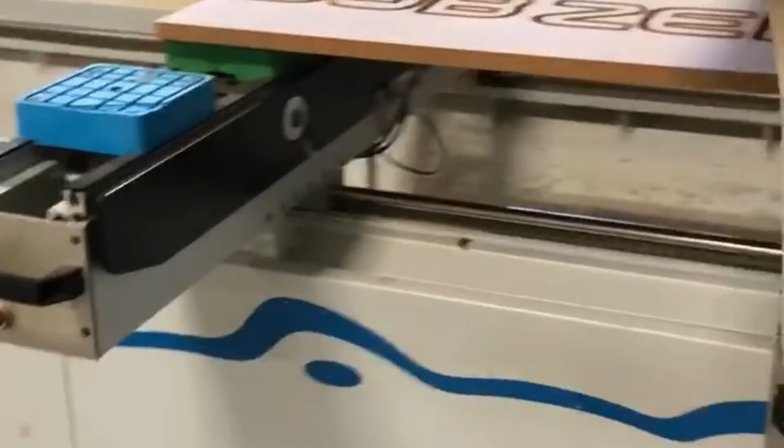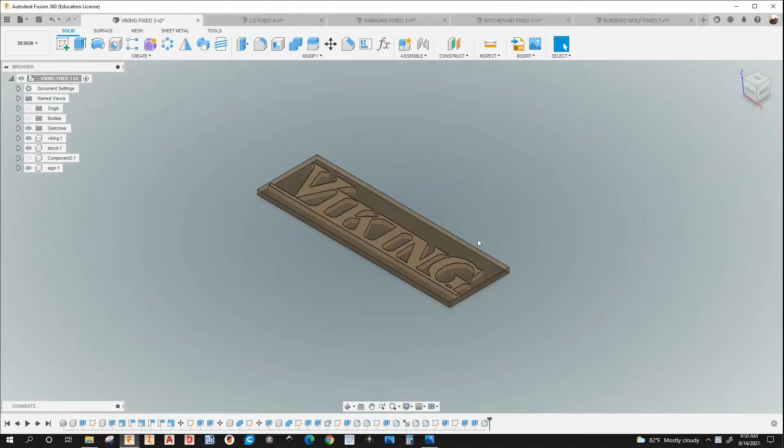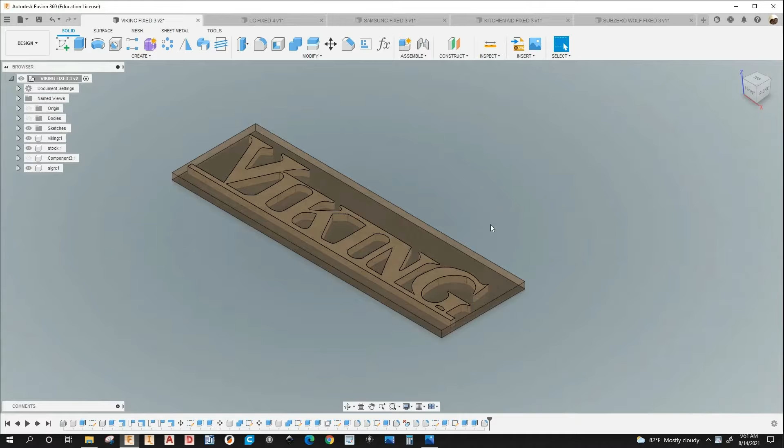All right, in this video I'm just going to show you, as you saw in the beginning of the video, the pictures that one of the co-workers took when he went to the exhibition show at one of the town hall buildings here around my area. He sent me the pictures, how the signs look, everything. And I was really happy about that. The signs came out nice as well as the cabinetry. I did the cabinetry and the signs on the Weeke CNC machine that I program and operate.

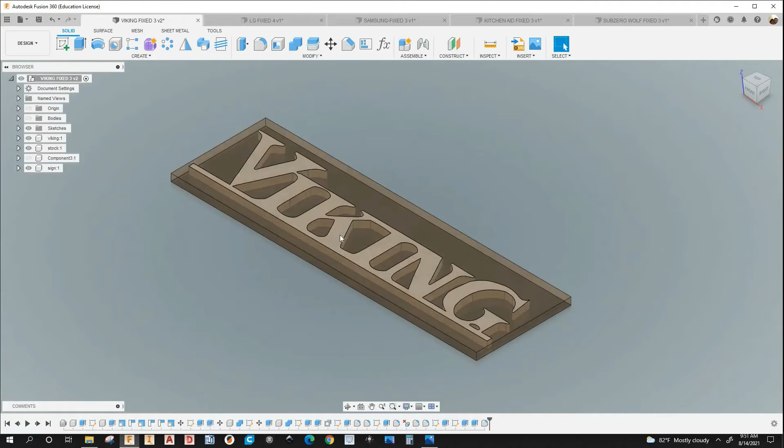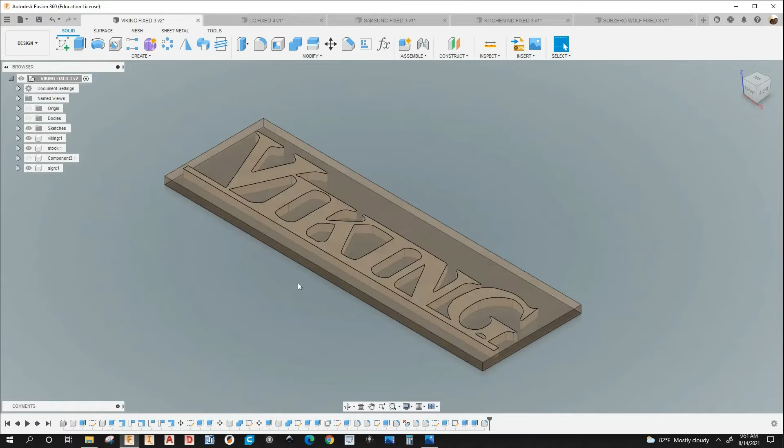But in this video, I'm just gonna focus on the signs, right? Because it's hard to model this in Woodwop or even wood type. So for this job, I used Fusion 360 for the 3D modeling and programming. It was way easier. It was faster. So right now we're gonna start off with the Viking sign, right? Let me show you the other ones. I got the LG here. I got the Samsung. I got the KitchenAid. I have the Sub-Zero and Wolf.

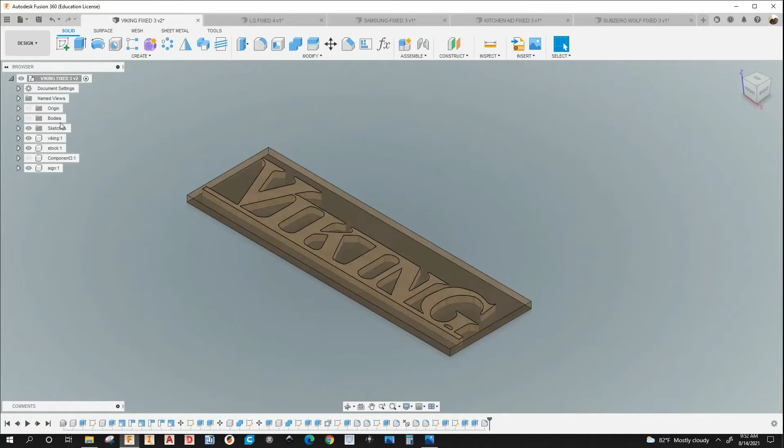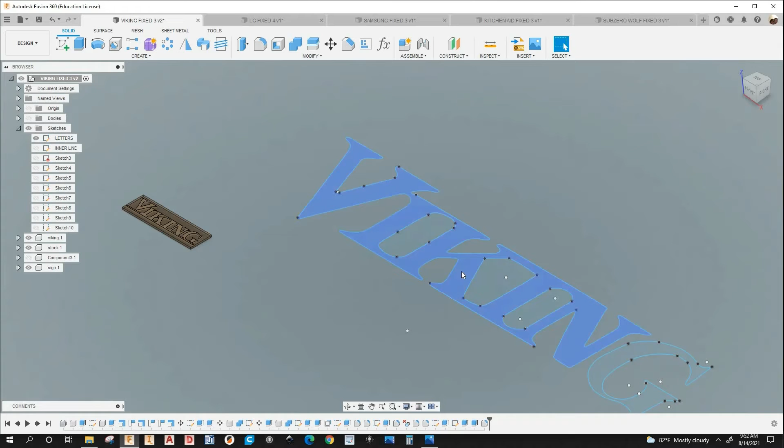All right, so let's start off with the Viking. So this is the 3D model. So I got the sign and I got the stock. All right, and I'm gonna show you the sketch. So it's right here. I think it's this one. Zoom out, as you can see it. It came into Fusion 360 this size. I had to resize it. All right. This was imported as an SVG file.

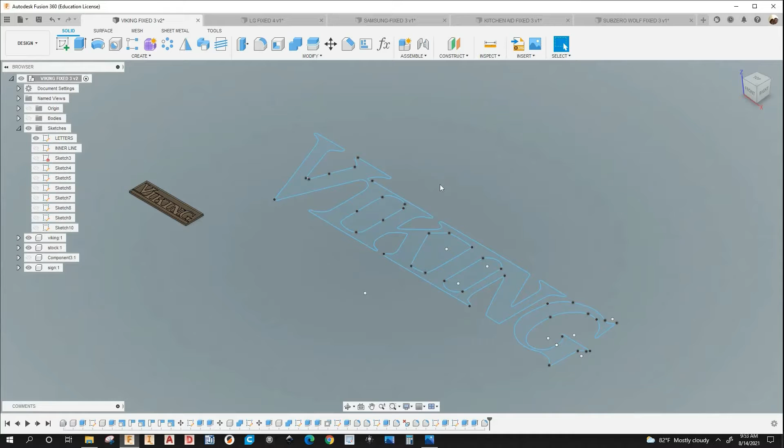So I got the pictures from my boss that he got from the customer. I imported those pictures into Inkscape. I traced them and I saved them as SVG files. And then I imported those SVG files into Fusion 360. All right, so this is an SVG file here, as you can see. Turn that off. All right, so I'm gonna show you what I did in programming. So I'm gonna go to manufacture.

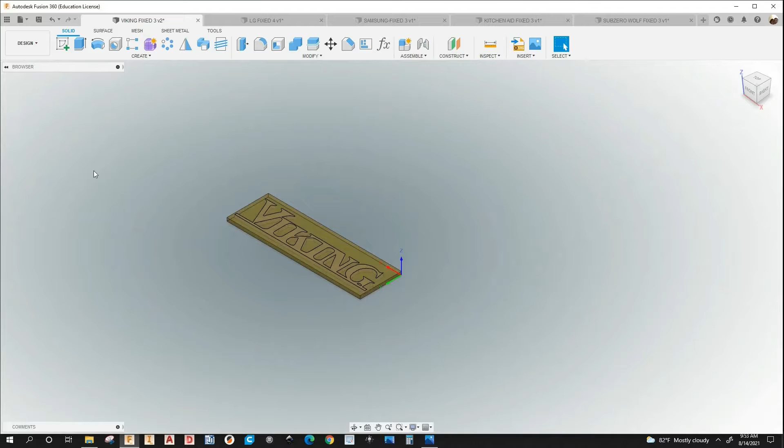So we started with the 2D pocket with a 1/4 inch end mill. I think I got a 4 millimeter step down. Let me check. Want to edit, just a 1/4 inch flat end mill. I have it at 6 millimeters because that's actually the size of the end mill. How do I know? Well, I did a test piece on the CNC. I checked the width of the groove. It was exactly 6 millimeters, so it wasn't 6.35.

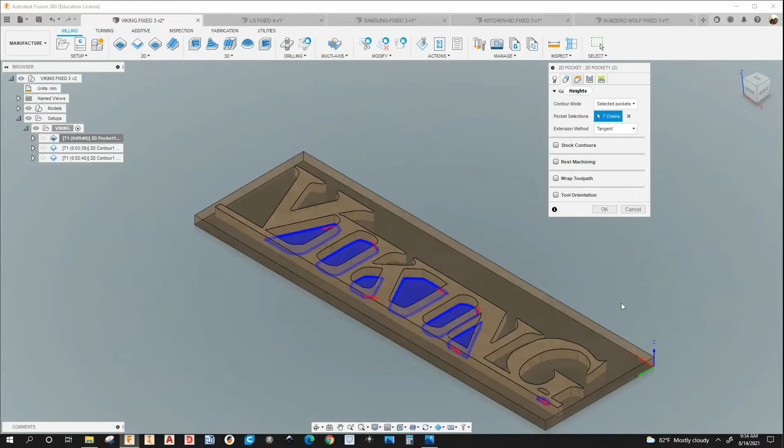All right, so yeah, let's go to geometry. So I selected the pockets and the heights. I left 1 millimeter material because I didn't want to cut the vacuum pods. I had like 3 vacuum pods here holding the part. Passes. So that's a 5 millimeter step down. All right. And the linking, the ramp type is zigzag. So then let's simulate this.

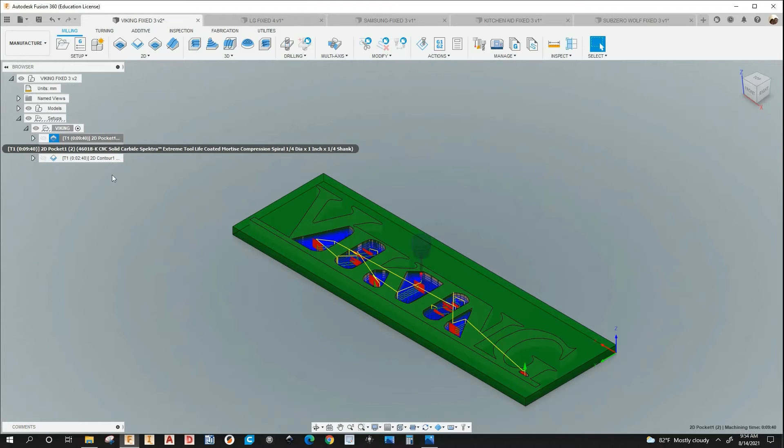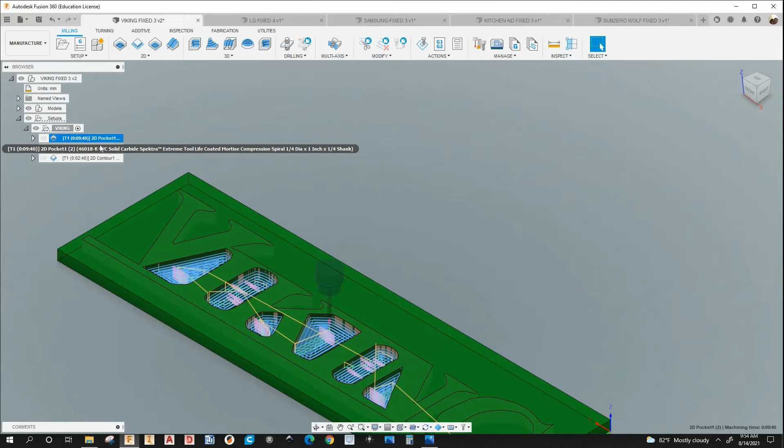There was a collision there, but you can fix that. You can just adjust the retract height. You can go higher than 5 millimeters. But I ran the program like this. I didn't have any issues with the machine, so I'll just leave it like that.

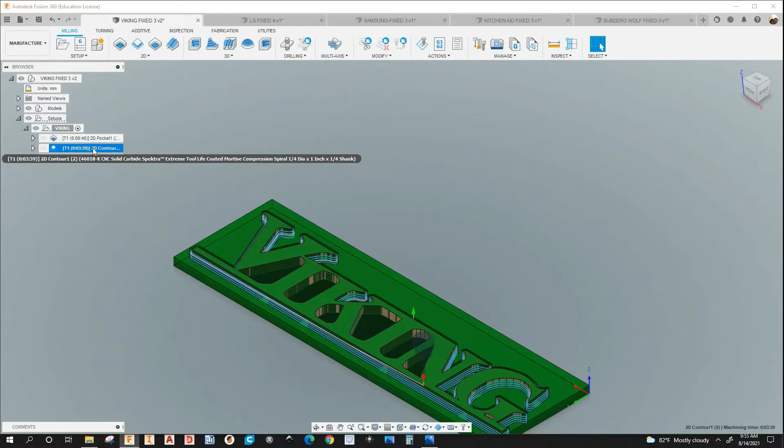And then I did a 2D contour with the same end mill, which is a 46018-K. This is a Spektra end mill from Amana, and used a 1/2 inch 46014-K. It's a 1/2 inch end mill, and the reason why I use a half inch after that is because

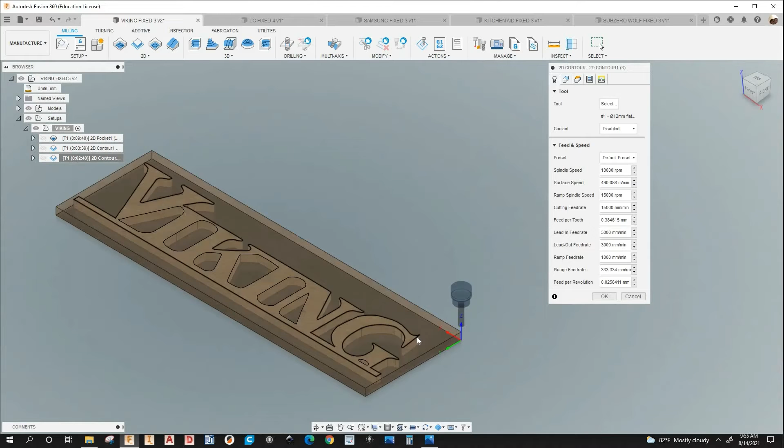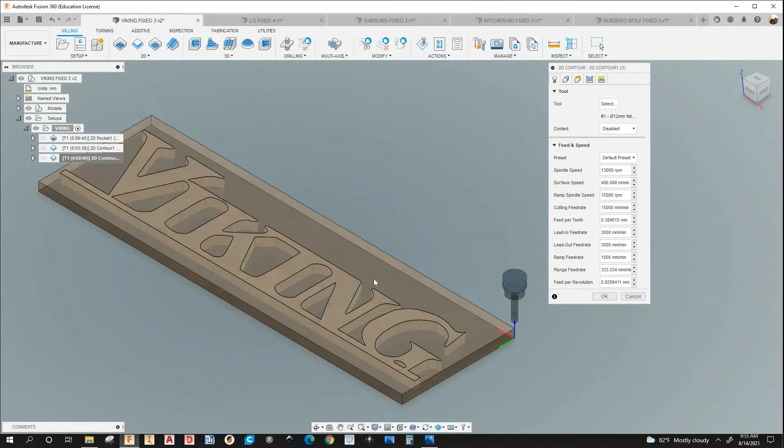the guys, the cabinet builders, they didn't have a quarter inch or anything smaller than a half inch to cut this sign out, right? With the portable router. So they told me they only had a half inch bit on their portable router. So that's why I used a half inch. And I did an offset of 2 millimeters, right? So the spacing will be just a little bigger than half inch, so you can get the router bit in there and cut the sign out.

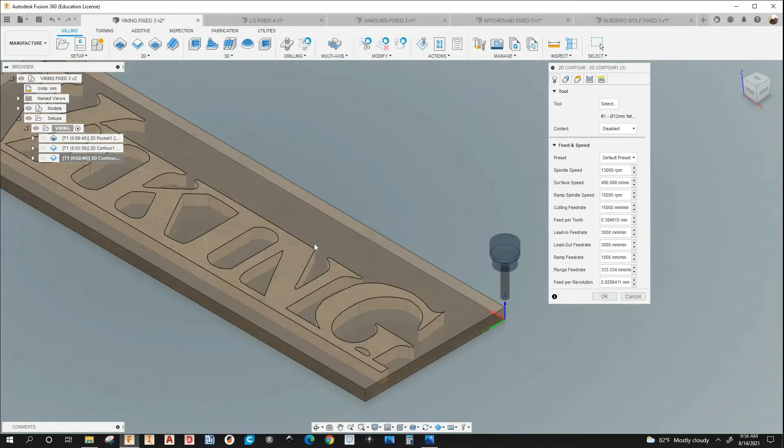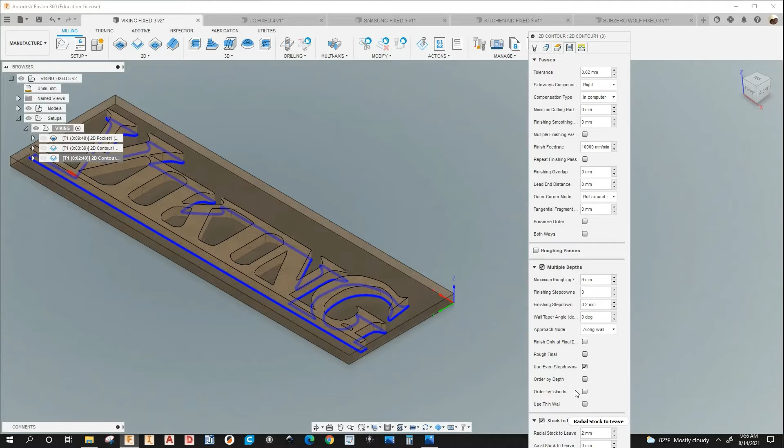So let me go to passes. I'll scroll all the way down. The step down is 9 millimeters. Let me go down to see where it says stock to leave. The radial stock to leave was 2 millimeters, so it was an offset. If you want to make the sign a little smaller, you put a minus number there. Positive is an offset.

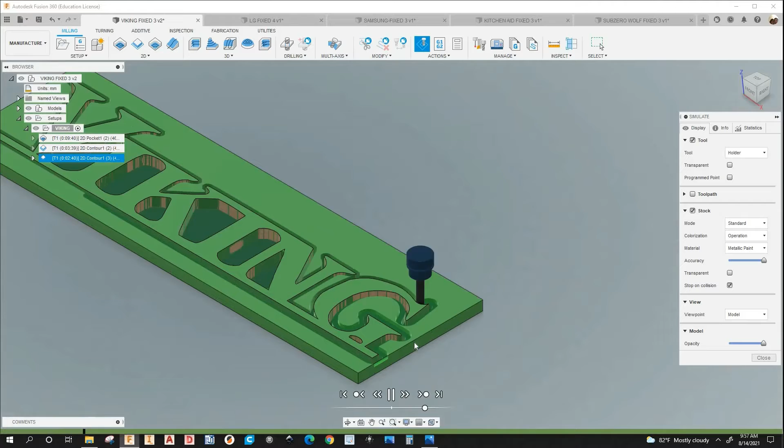So the tool is going to be 2 millimeters away from the geometry, right? So let me simulate that. I'll show you how it looks. Go a little slower. Put it on top view.

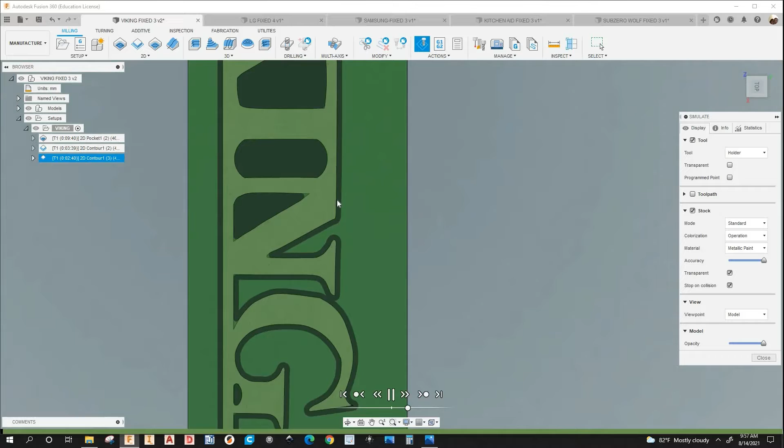Let's go to stock, transparent. See, so the tool is offset by 2 millimeters. So this will be like 14 millimeters wide. So that's plenty of space. So you can put a half inch bit there and cut this out, right?

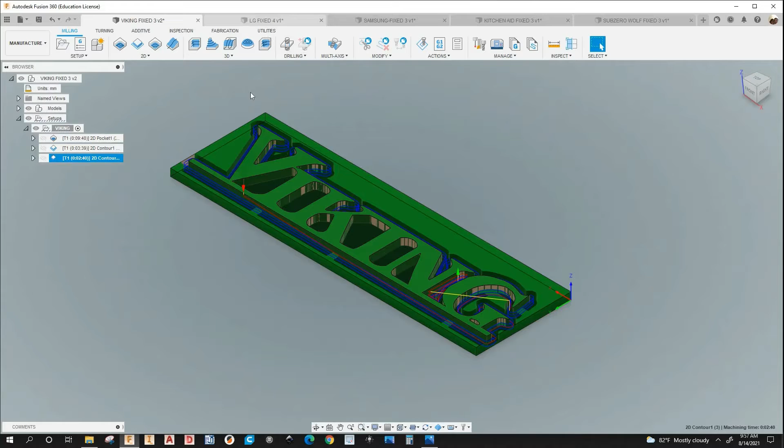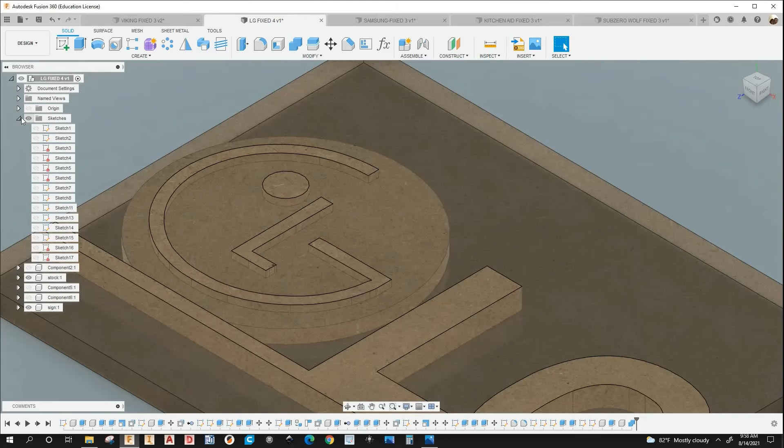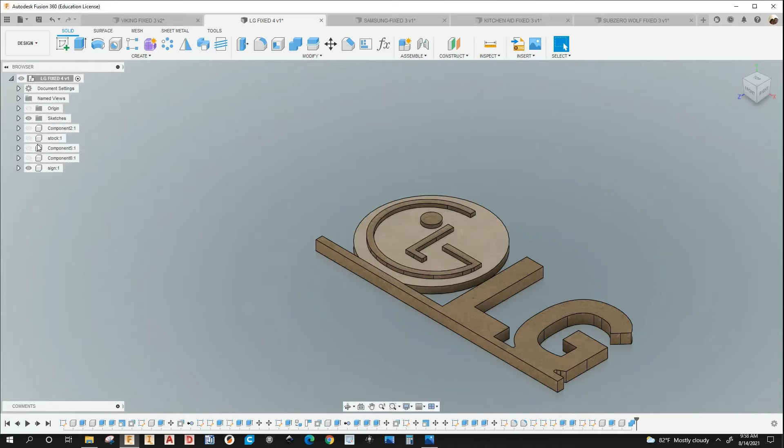So I did a pocket here with the 12 millimeter mill. This is a quarter inch deep. So let me turn the stock. I'll show you. So hit I on your keyboard. Check the depth. So I'm gonna select this edge here. That's a quarter inch. So that's how deep I want here. This face, right? And that's the LG sign. Stock. Right. Everything was out of 3/4 MDF.

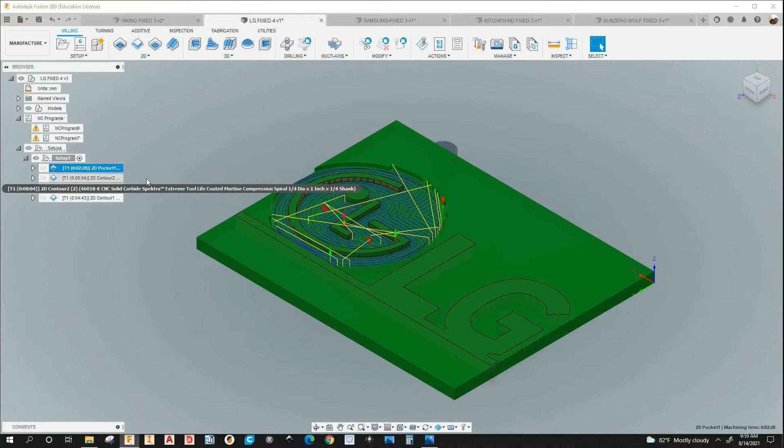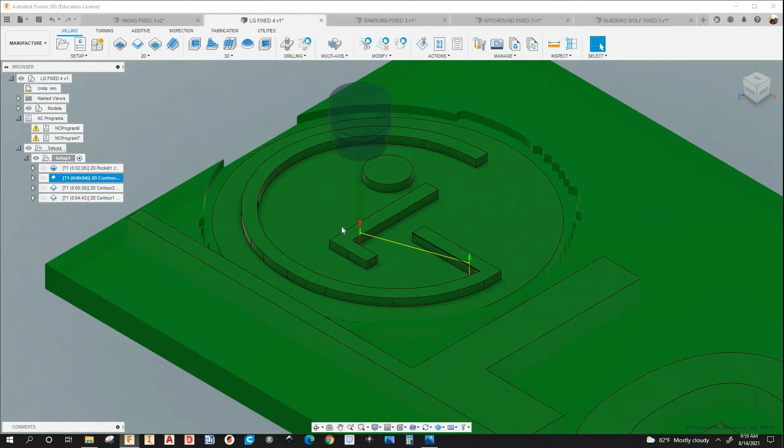So let me go to the manufacture. I'm gonna show you the programming part of it. So I did a 2D pocket with the 9 millimeter mill, and then I used a 6 millimeter mill. That's the 46018-K. And I was just going to the corners where the 9 millimeter mill couldn't get, right. And I'll show you what I did.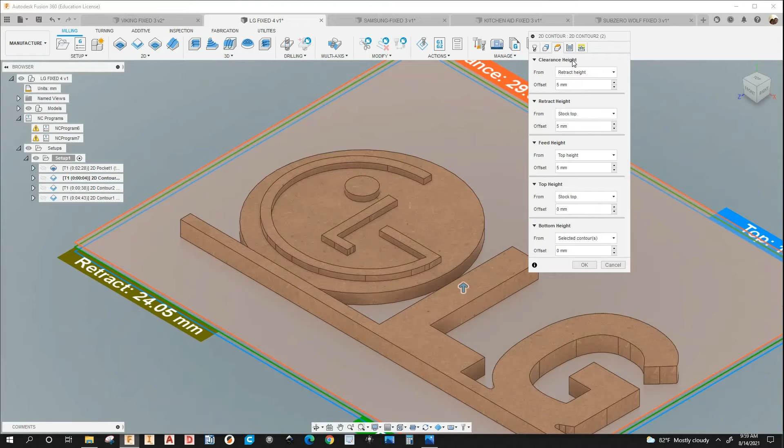So I use rest machining. So let me show you where it is. So right click, edit, and where it says geometry, you check where it says rest machining, and then you just enter the previous tool diameter, which is 9 millimeters, right? That's the first operation that I used, the 2D pocket, and then just click OK. But let me show you the heights and passes.

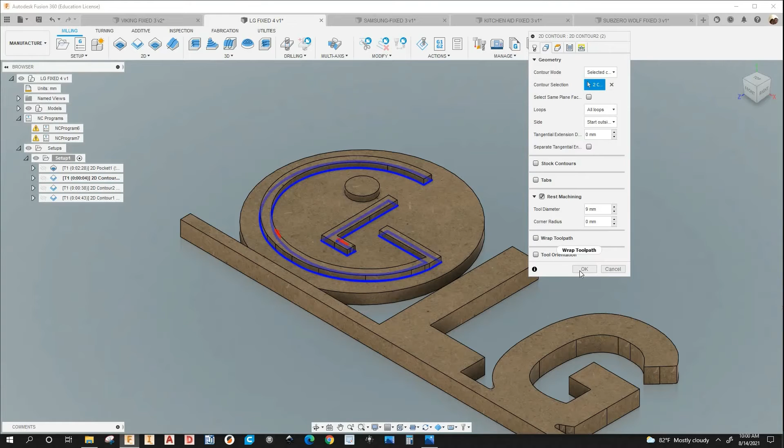I didn't make any changes here, and I'm just plunging. So yeah, that's how I use rest machining. It's a big time saver for me. I really love this feature that Fusion 360 has. So the next operation is 2D contour. Oops. Okay. Oops, it's all the way around.

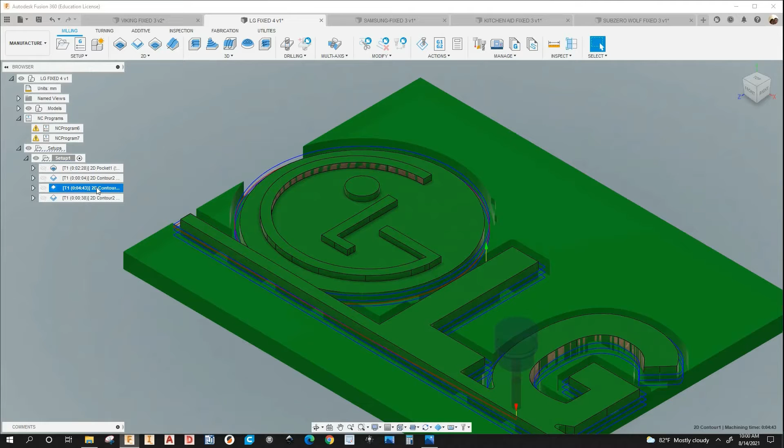And I use a 2D contour for the profile with the 9mm mill, the same one that I used for the 2D pocket on the first operation. All right, I left, I think it was 1mm of material. Let me edit that. Let me go to height. Yeah, 2mm, and I had a 7mm step down, and the ramp type was a ramping angle of 2 degrees.

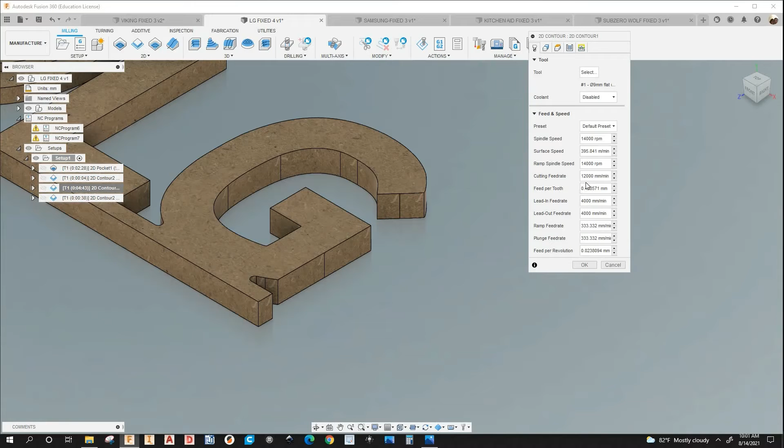Okay, it's the 9mm flat mill. I got the spindle speed. I got the cutting feed rate, 12 meters per minute. All right, and then I use a 2D contour with a 1/4 inch mill just to get to the corners where the 9mm mill couldn't get, right? And I use rest machining.

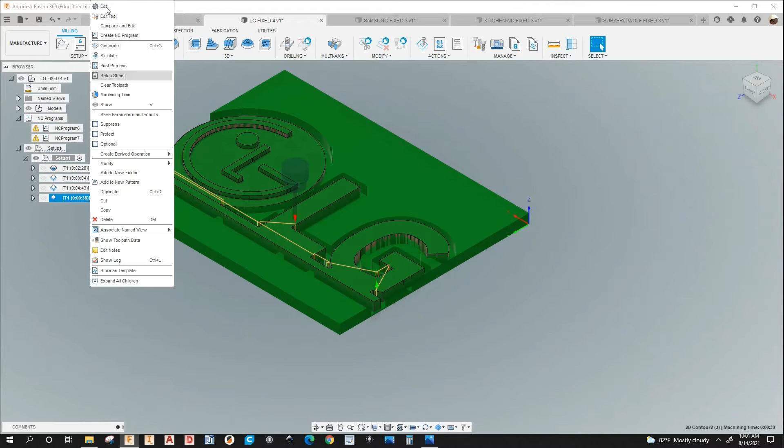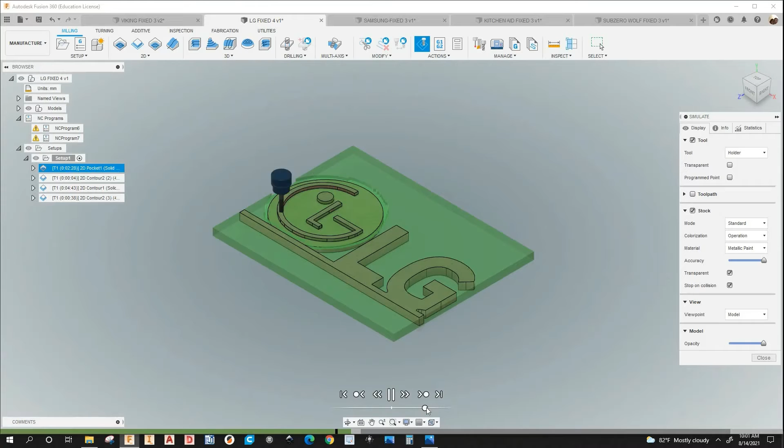So just select that, edit, and we go to geometry, and I'll show you that. See, rest machining is checked. All right. So then let me simulate that so you can see how it looks. Right click, simulate. Doing the 2D pocket, and there's a tool collision there. I'll check that. Go back.

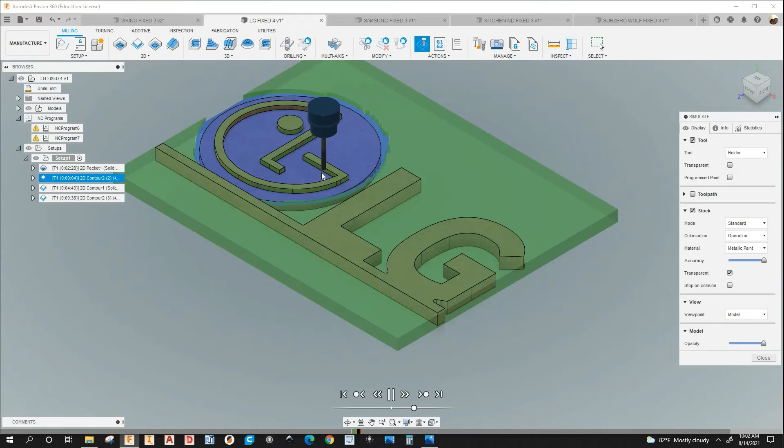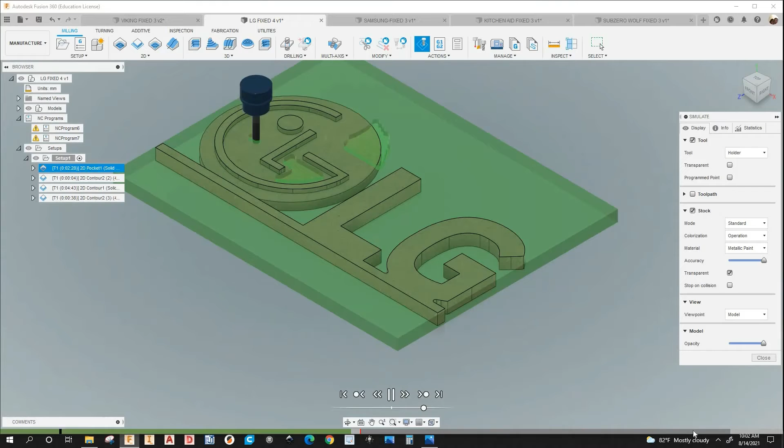So you get into that corner and this corner, and then I switch to a 9mm mill for the profile. And then go back to the 1/4 inch mill. Oops, go back here. Okay, slow down a little bit. That's a 1/4 inch. So it's getting to those corners. It's got smaller radiuses. Okay, and that's the LG sign.

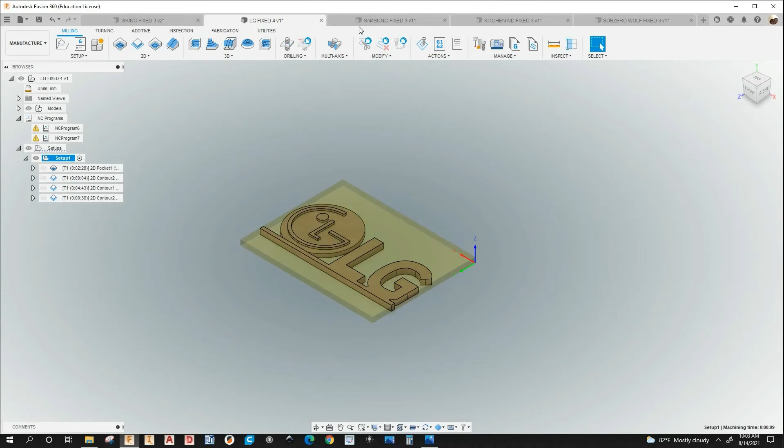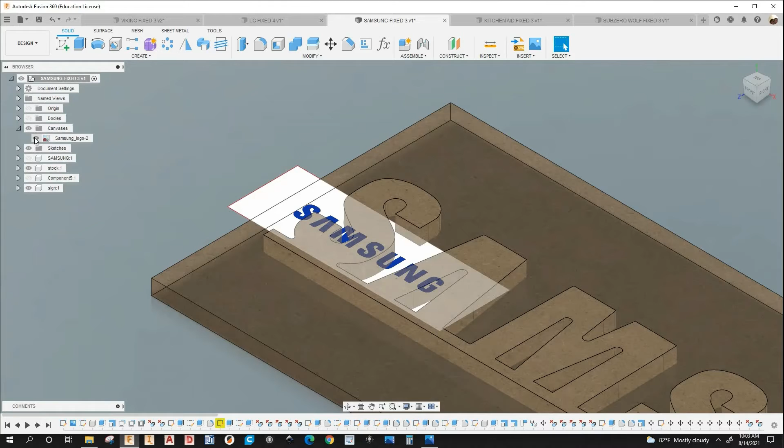All right. Let's go to the Samsung sign. It's pretty much the same as the Viking. Right. And I already showed you about the SVG file. See, I think this one I used a canvas, not SVG. That's the canvas. See the Samsung canvas. All right. I have the stock there.

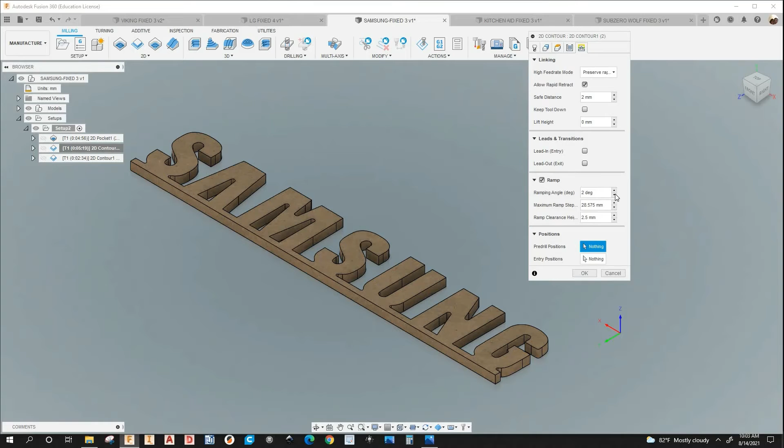Let's go to manufacture, and there's a 2D pocket with a 1/4 inch mill, and there was a 2D contour with the same mill. I think it was a 5mm step down. Check, yeah. Ramp is the same, didn't change. All right, same tool, 46018-K. And then I use a 1/2 inch 46014-K mill. Everything's the same as Viking. So it's nothing different. So LG is a little different.

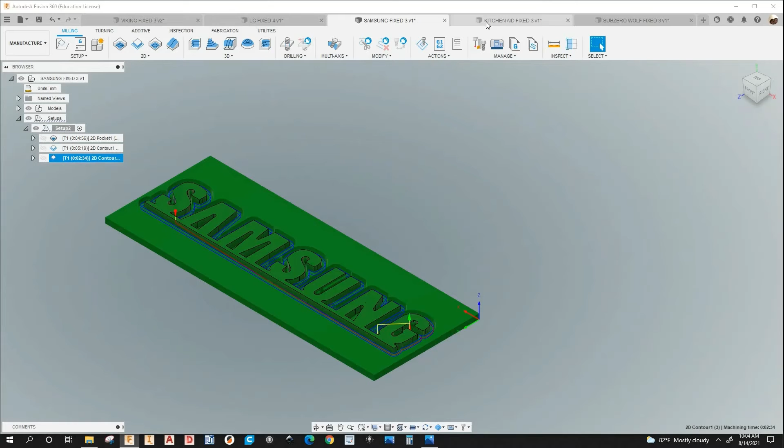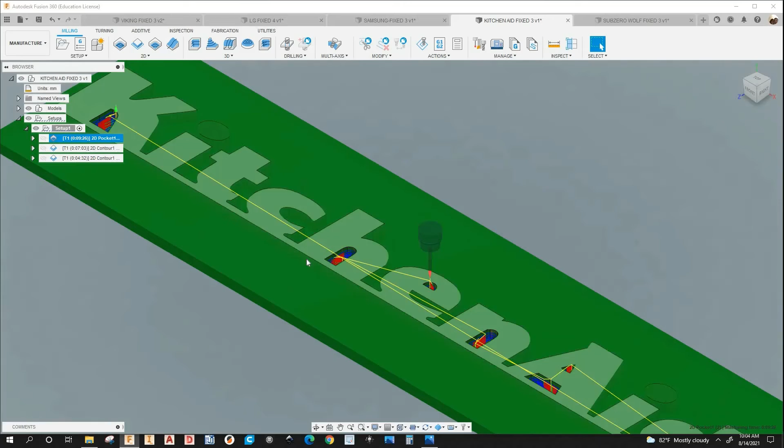All right, so let's go to KitchenAid. Let's go to manufacture. I'm not going to show you the sketch. You already know what I did with the SVG file, and the Samsung was a canvas. All right, let's go to manufacture. So it's a 2D pocket with the same mill, the 46018-K.

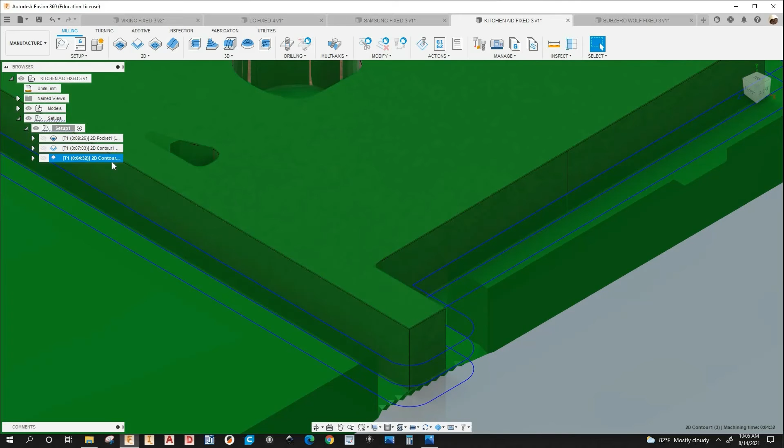And it was a 2D contour, the profile, same mill, 1/4 inch, and it was the 1/2 inch mill 46014-K. All right, I'm leaving 1mm of material. I think this one was probably 2. Let me check. Oh, it was 1mm. All right. Let me simulate this.

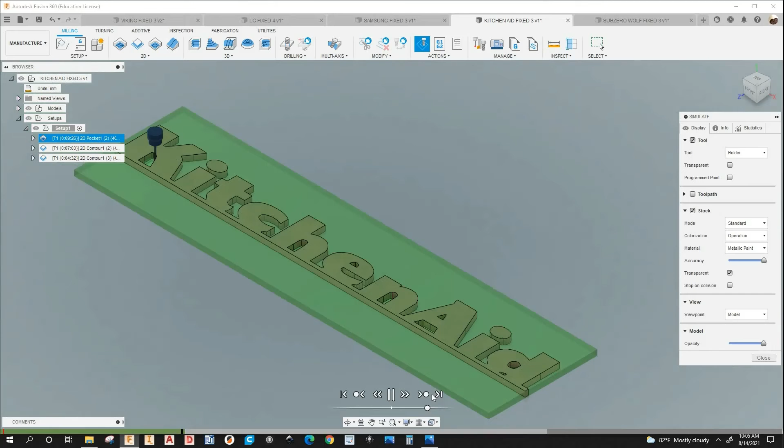She's doing the pocket. Let's go a little faster here. Doing the pocket, and the profile.

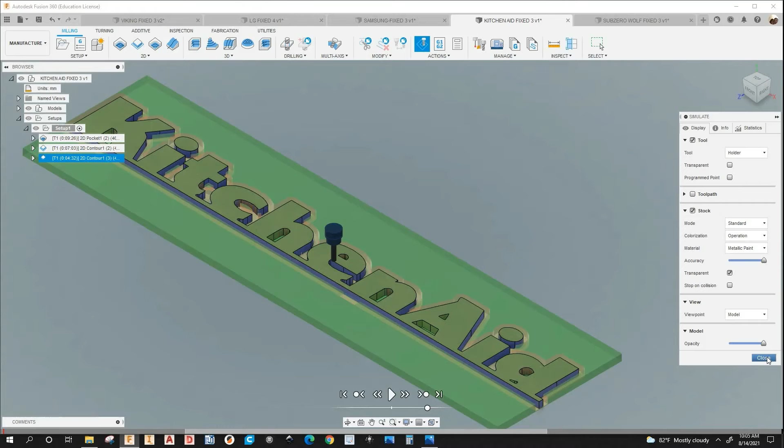Then I switched to a half-inch end mill. Just like the Viking one, I had a 2 mm offset. I did the same thing with the Samsung that I forgot to mention.

And the last one, the Sub-Zero Wolf. This one I had to do a lot of modifications to it, because there were some changes. All right, let's go.

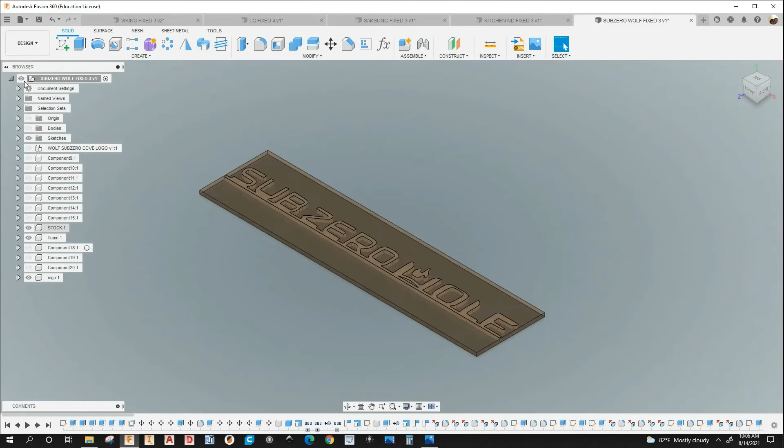This one has a sign. It has a flame, it has two separate components. See it? And then I have the stock. Let me go to Manufacture and I'll show you what I did.

2D pocket with the same quarter-inch end mill, 46814-K, and then 2D contour with the same end mill, and then I used a half-inch end mill, 2D contour, 2 mm offset, just like Kitchen Aid, Samsung, and Viking.

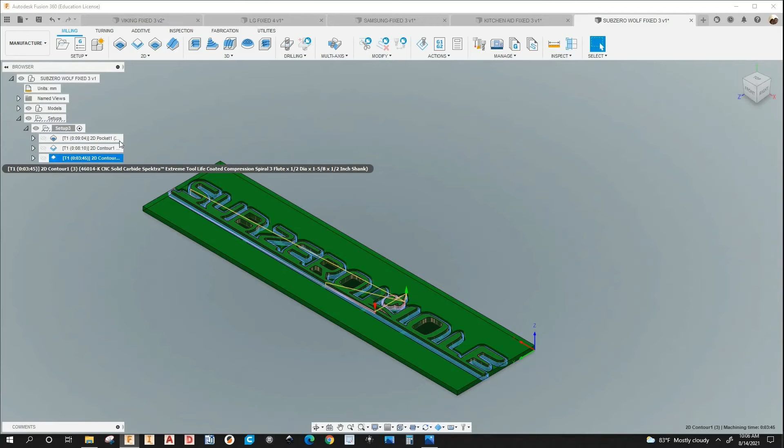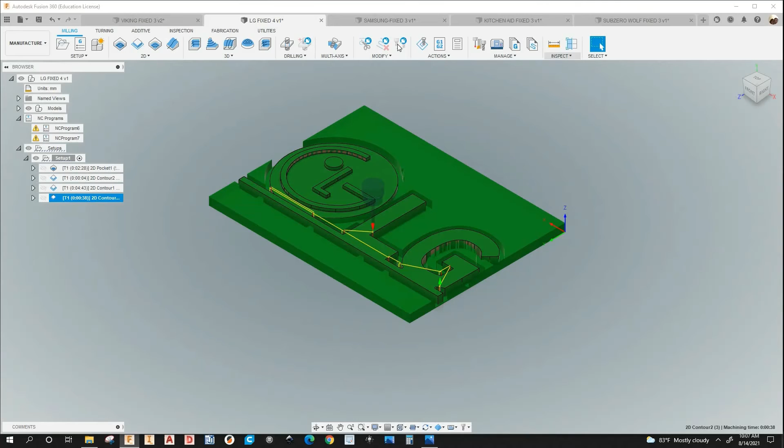On the LG, I didn't use a half inch because I didn't have too much space here to get a half inch. So I had to tell the guys to order a quarter-inch bit for their portable router. So on this one, they use a half inch as a finishing pass, just like the others.

So yes, the 2D pocket. It's a 2D contour with a quarter-inch. It was a half inch. 2D contour with a half inch, 2 mm offset.

See right here, if you hover your mouse over that, it shows you a picture of it. So it's really that simple. See, I got the feed rate, tolerance. This is what really works for me right here.

These are the ones you guys want to use. You get less contours in Woodwop, so you get less jerking movement of the machine. You get a better, smooth transition with the machine.

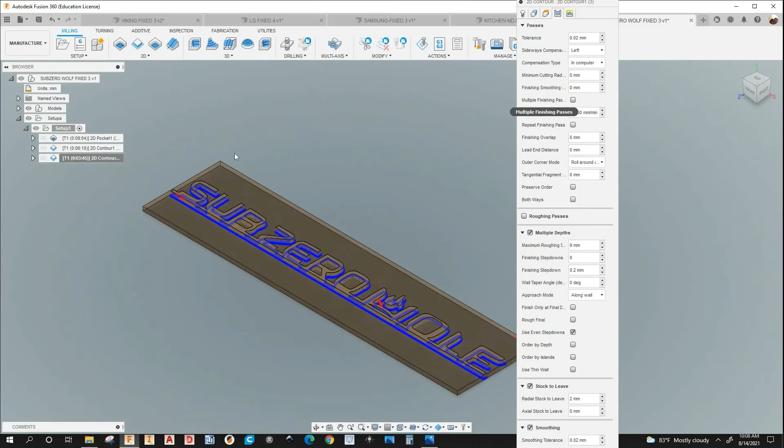This tolerance right here, you guys have to use, and the smoothing is the same as tolerance. Especially if you have an old machine like I do. You want your file size to be small, not that big, because...

When you upload that program in Woodwop, when you have too many contour lines with an old machine and old computer, it's gonna freeze. That's a pain in the butt when you have an old machine and old computer. So you're trying to get your file size down. See, this is the size of the file right here.

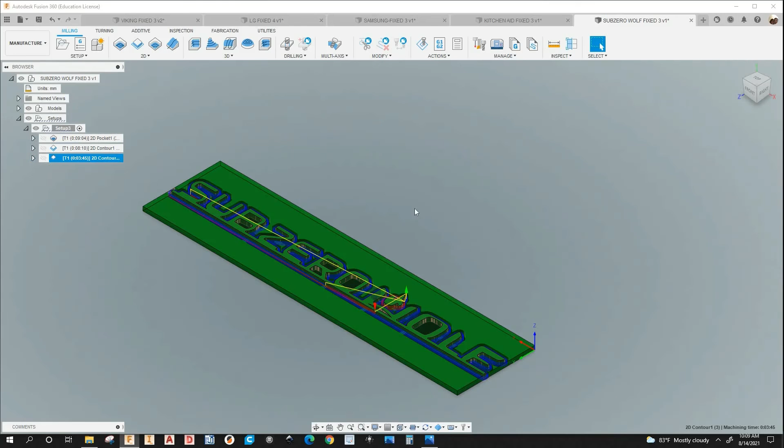If you have a new machine, a new computer, that would be great. You can have so many contour lines in Woodwop, and it won't even lag or freeze. Okay, so yeah, this is what I did, programming-wise.

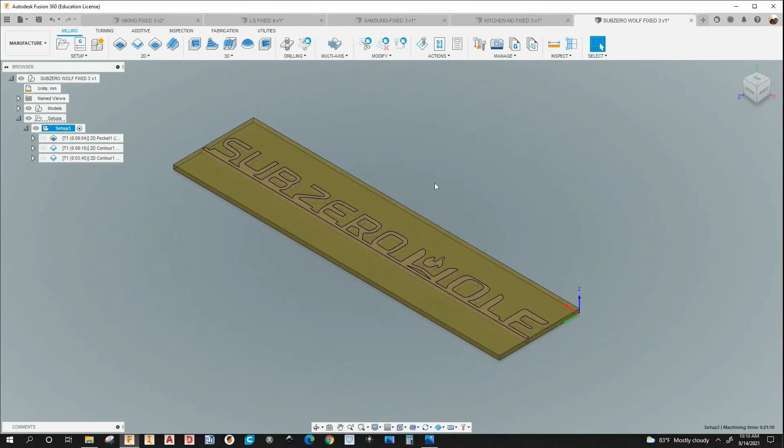How to use Fusion 360 to program your Homag and Weeke CNC machines. I'm gonna make more videos, different types of videos, like having a full cabinet that's built. I'm gonna show you how to use the arrange feature that Fusion has, so you can put your parts flat for CNC programming. I'll make a video about that.

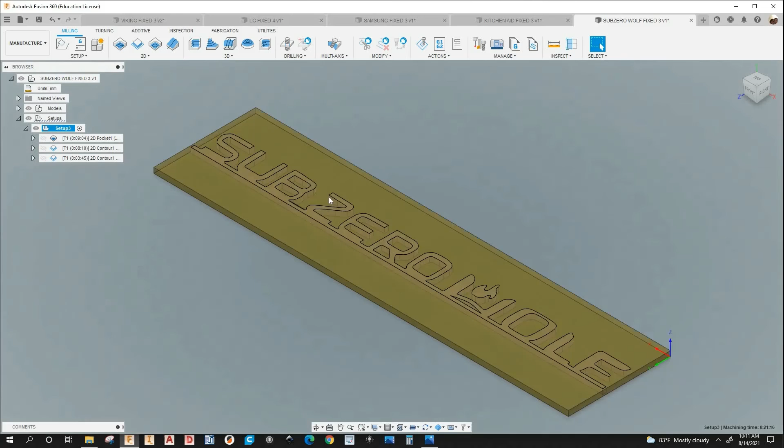I'm also gonna make videos about making holes, flat holes, and horizontal drilling.